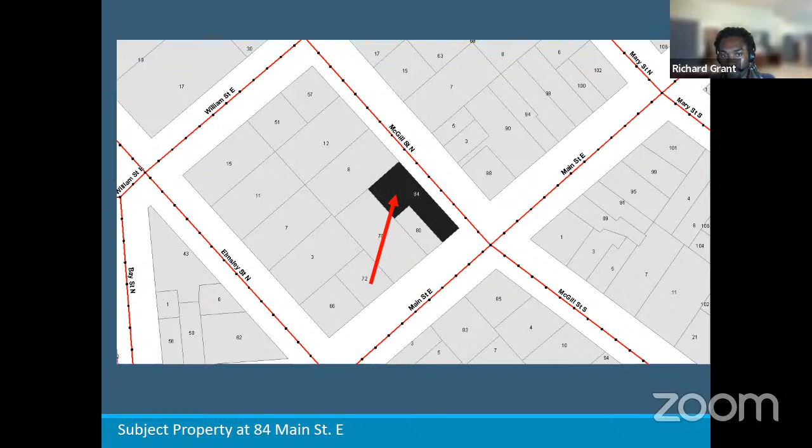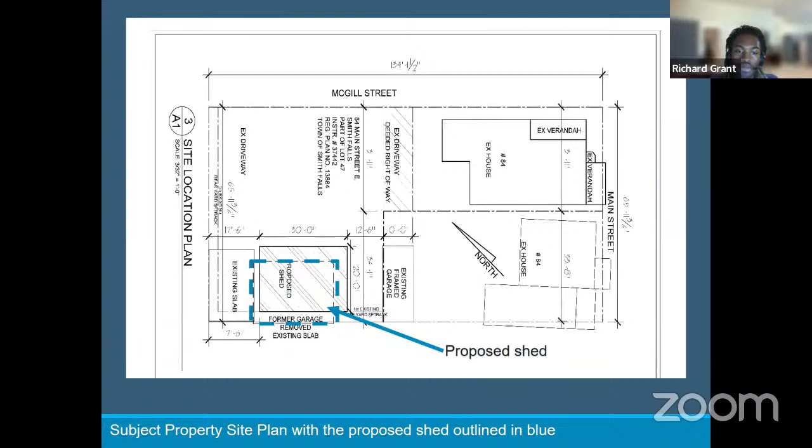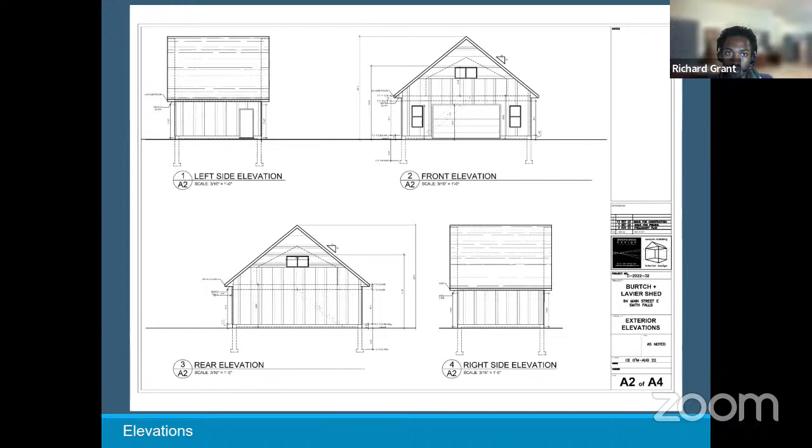Now, the purpose of public meetings is to involve the community in considering a change in land use rules for a given parcel of land.

The feedback given was from Public Works, advising that once the application has been permitted, there will be an inspection from the building department to ensure that any grading issues have been addressed, and ensuring that the eaves troughs are directed and discharging into the interior lot instead of abutting the property line. That was just a bit of note that the Public Works Department had.

Now, these are the four tests from section 45 of the Planning Act that set out to determine if the minor variance is good or not.

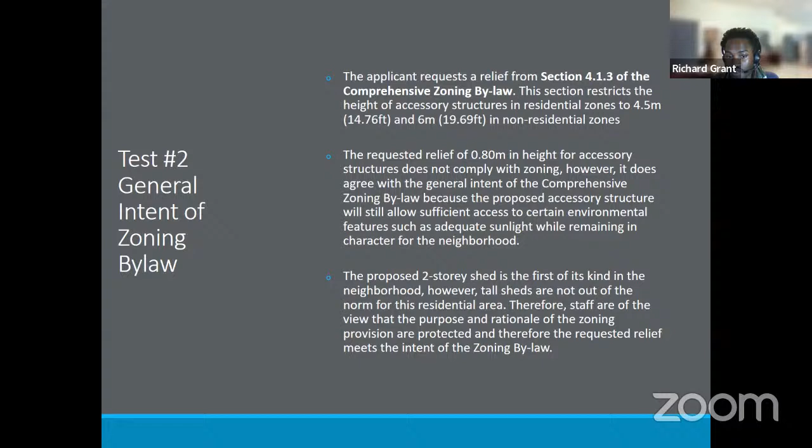Test number 3, desirable or appropriate: the proposal represents an individual opportunity to provide improved use of the applicant's amenity space as additional storage. The proposal also supports an existing residential use in the neighborhood by replacing the previous shed as noted.

Test 4, minor in impact and nature: located in the applicant's backyard in the far corner farthest away from the street, it will have a minimal visual impact on the neighborhood. Also, being well treed, the concern of creating an excessive amount of shadow or loss of sunlight should not be great despite its size and because of its location. Additionally, the trees add extra cover that overcompensates for the location of the two-story garage. Based on its location and intended purpose, the request for relief would permit an accessory structure that would have minimal impact on the neighborhood, while increasing functionality of the residential space.

This is my recommendation to the committee: the decision shall apply to permit the height relief of 0.8 meters of the proposed two-story structure within the backyard of the property, as detailed on the site plan and elevations.

Also, I should note that the recommendation given by Public Works is not necessarily a condition. It's more just something that should be noted when the permit application has been processed. Thank you.

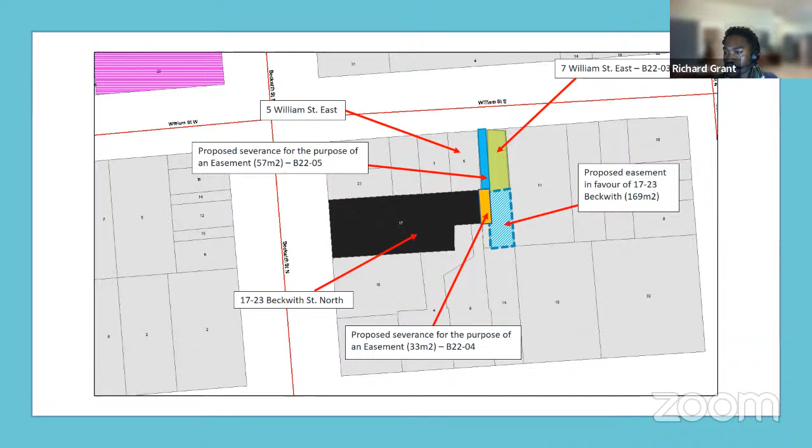Next slide please. Application B 22-03 proposes to sever the lands at 7 William Street East from 17-23 Beckwith Street North. Both properties were merged because they're owned by the same person, Mike Tabaja, creating a 339 meter square vacant lot that's going to be accessed from William Street East. The application also proposes to create a 169 meter square easement, currently consisting of a parking area, to benefit 17-23 Beckwith Street North.

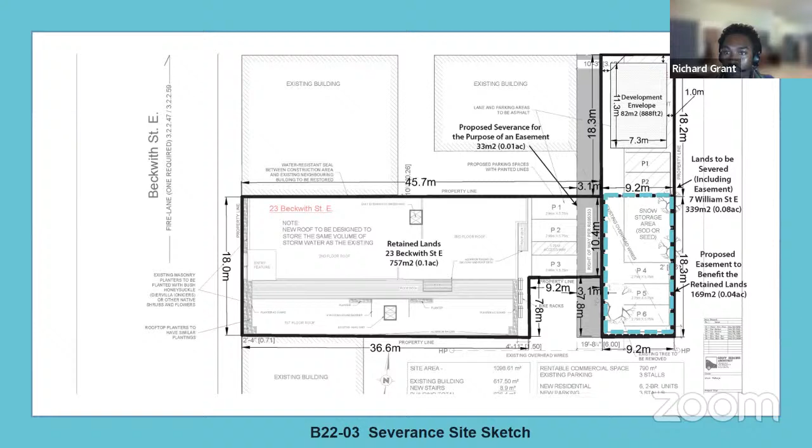Next slide please. Application B 22-04 proposes to create an easement that is 33 meters squared, essentially the right of way discussed in the previous slide. This will go behind the existing building at 17-23 Beckwith North, and will provide access to the lot at 7 William Street East.

Next slide please. The highlighted portion shows the easement being created for application B 22-04. The lot adjacent to it on the right is the lot that's going to be benefiting from the easement, and this contains the development envelope as well as the additional parking. The lot on the left is the commercial building at 17-23 Beckwith Street North.

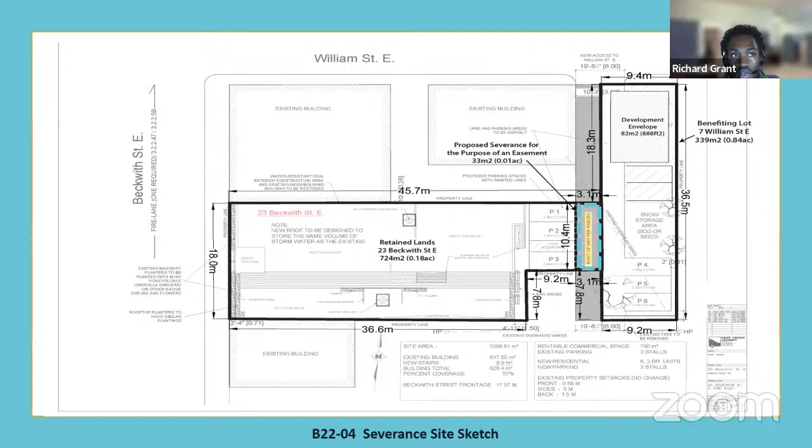Next slide please. Application B 22-05 proposes to create an easement that is 57 meters squared from 5 William Street East, to provide a permanent legal access to the parking areas behind the properties. Next slide please.

This is highlighted as the blue rectangular dotted line surrounding the easement that will be created because of application B 22-05. Next slide please.

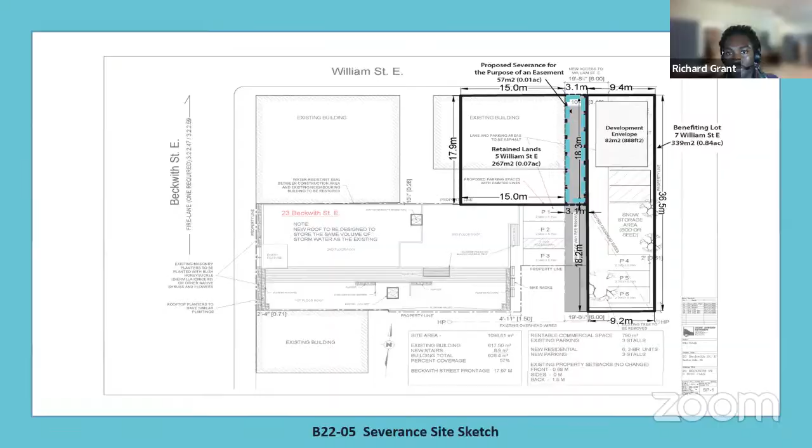A bit of background: the applicants are being represented by Tracy Zander of Zander Plan. Site plan approval was given earlier this year by council for a two-story addition to 17-23 Beckwith Street North to accommodate 6 residential units. Mike Tabaja had bought 7 William Street and demolished the building, and now it is a vacant lot, being described as part of a conceptual development envelope. We'll get to that in the next minute.

The current intent for the lot is to provide parking for the new development at 17-23 Beckwith Street North. Application B 22-03 illustrates the conceptual development envelope, and it is not a proposal, it is more justifying the reason why 7 William Street can be severed. The approved site plan for 17-23 Beckwith has a driveway alongside 7 William Street East, but due to application B 22-05, it's going to be replaced and removed to allow for a larger building envelope at 7 William Street East.

Next slide please. For the site plan agreement, 17-23 Beckwith also has an additional landscaping security in the amount of 10,000, which will be used if the lot at 7 William Street East is not developed within a year. So there is a year that they have to develop 7 William Street East. The proposed lot also contains an infiltration area identified in the stormwater management plan associated with the site plan agreement. Next slide please.

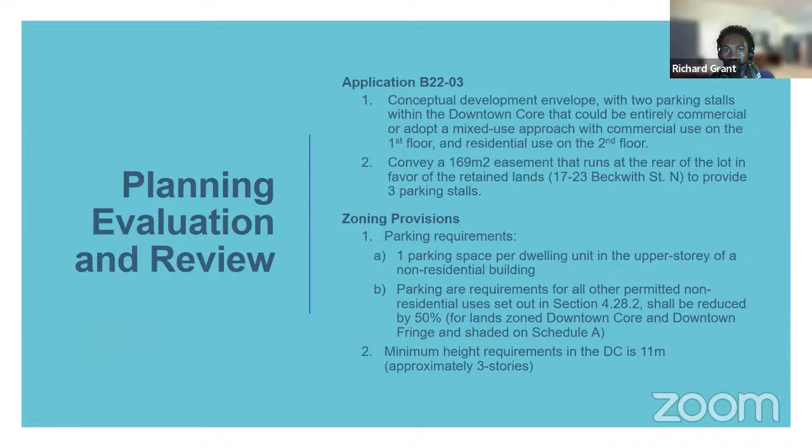Application B2204 proposes an easement behind 17-23 Beckwith that would favor the lot at 7 William Street East. The creation of the easement would provide pedestrian and vehicular access and satisfies any access requirements posed by the development of the commercial building, because the commercial building would need a minimum of at least 6 parking spaces. And I believe from my memory that the applicant had applied for a cash in lieu because he initially did not have enough parking.

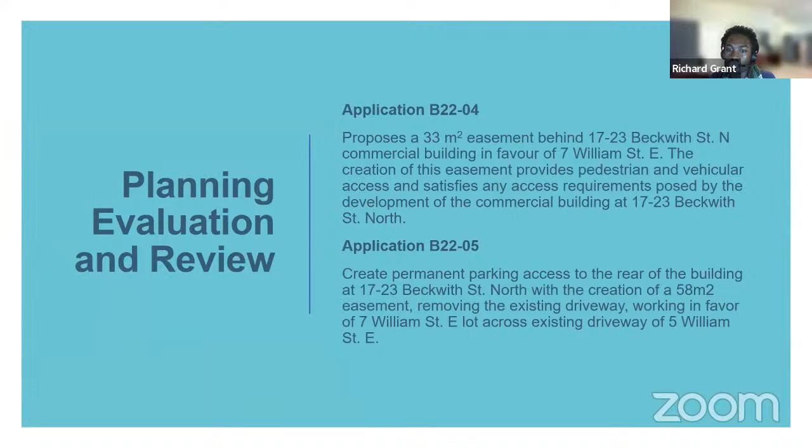Now, application B2205 also creates permanent access to the rear of the building for 17-23 with the creation of an easement that is 58 square meters, by removing the existing driveway and essentially creating, with an easement, permanent access for 5 William Street East.

The Planning Advisory Committee is tasked with deciding on these applications presented. They should be made aware that they would be approving or not approving all these applications together, since they're all dependent on each other, if they believe that the application is either viable or not.

Based on the review of the applicable governing policies and consideration of the intricacies of the subject property, planning staff are of the view that a severance to create infill development on William Street East, as well as two easements, is supported on policy and can be given favorable consideration by the committee. Next slide, please.

Staff recommend that the committee approve the consent application B2203. One thing that should be noted is that the owner shall demonstrate to the satisfaction that the site plan control agreement between the town and Mike Tabaja will remain in effect with the severance of lot 7 William Street East. The next slide, please.

Staff recommend that the committee approves the consent application B2204, subject to the following conditions. Next slide, please. And similar conditions apply for application 2205. Thank you.